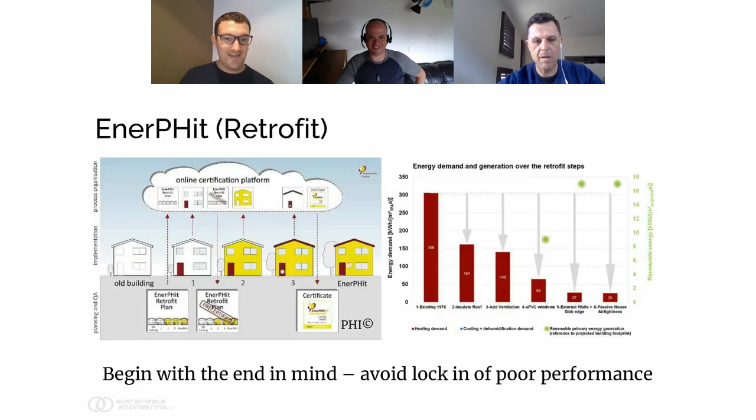Cool, yep, we should get going. Numbers have kind of stabilized, but I'll hand this over to you. I can see you've jumped - let me just put back your slides, Jason. Thank you, appreciate that, good preview of what we'll see today. There's a lot to cover today, but we'll take it at a reasonable pace so it shouldn't be too bad, and we'll try to finish 45 minutes after the hour. It's a different time zone for me. We're going to drop our faces off and we'll see you guys at the end, so that way you can concentrate on this. Yep, and it also means I can drink tea while we're talking. Absolutely.

So just a little bit about myself. I shifted to New Zealand about 10 years ago. Before that I was a rocket scientist - I worked at NASA for a little over a decade doing systems engineering. When I shifted to New Zealand, I wanted to try something different and see how I could make a difference in the world, and ended up growing into Passive House, as it were. I've been doing Passive House for about 8 years now, started off like most people with doing 1 or 2 homes, then moving into more and more projects, and finally becoming a certifier - I'm an accredited certifier with Passive House Institute in Darmstadt. I run a small consulting firm with 4 technical staff here in New Zealand, and we design and certify projects throughout New Zealand. We also certify and help with more advanced consulting on projects in Australia. We do quite a bit, including some more advanced training and that kind of thing.

So I think I've got control of the slides now, let's jump to the next one. So what is a Passive House? This is a Passive House project in Exeter, in the UK, where they've done an immense amount of social housing.

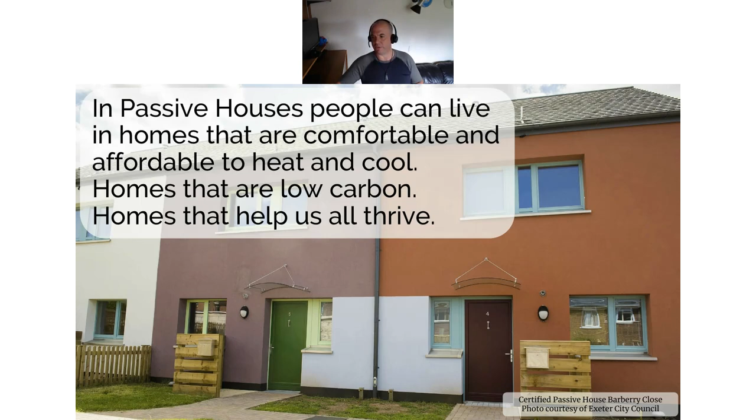This is my favorite definition of Passive House: in Passive Houses, people can live in homes that are comfortable and affordable to heat and cool, homes that are low carbon, and homes that help us all thrive, mainly through their health impacts. A slightly more interesting way to think about it is as a vision for what housing should be - if you talk to architects, designers, or people who live in homes, what should a home be, and what should we do going forward with homes?

When you think about homes right now in New Zealand and Australia, unfortunately both have a relatively high case of excess winter mortality, where people are dying potentially because of the conditions in their homes. We have cold, damp homes in both countries because the people in our politics have failed to prioritize health in housing policy.

We can design buildings that heal us and help us do our best in the world - buildings where the air inside the house is healthier than the air outside, certainly in cities, where it's always fresh and dry in the house. We can design houses where kids don't go to hospital with housing-related disease - this still happens quite a bit in New Zealand and Australia; Australia actually has more mold than New Zealand does. A house where it just keeps itself dry - the towels dry themselves in the bathroom, you don't have a towel rail that you have to turn energy on to dry the towels.

A home where we can build right for the long term. The leaders in the building industry today build houses to the lowest legal standard - any worse and it would be illegal for them to build those houses. Instead, we can have buildings that are a gift to people who come after us in society - built for the long term, low carbon, with less steel and concrete, more timber. We build homes where there's no fuel poverty. When I talk about passive house with clients, oftentimes they're older - they've gone through a few houses.

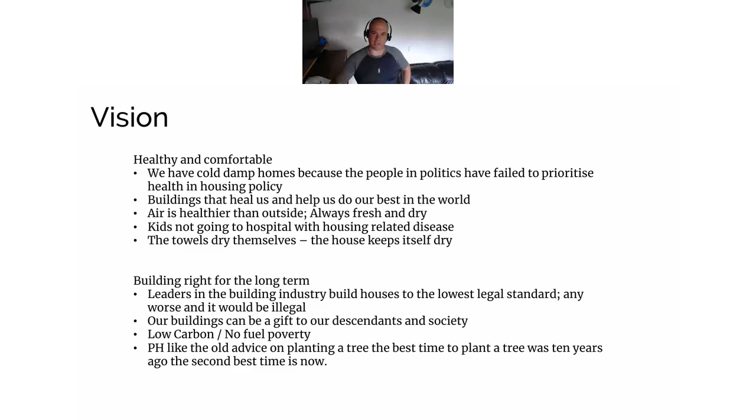So this is another social housing project in Exeter Council in the UK, and it's the last one from the UK, so we won't have a lot of pictures from there. I've got more pictures from Australia.

In Exeter City Council, there's one woman who led the charge towards passive house, and she did it not because she's an architect, designer, or builder. She's actually a property developer, and she grew up with extended relatives experiencing fuel poverty—they couldn't heat their homes in winter because they didn't have enough money. So their vision for passive house in Exeter Council isn't about all the technology and math and thermal modeling I love. Their challenge is to eradicate fuel poverty in their council area by using passive house.

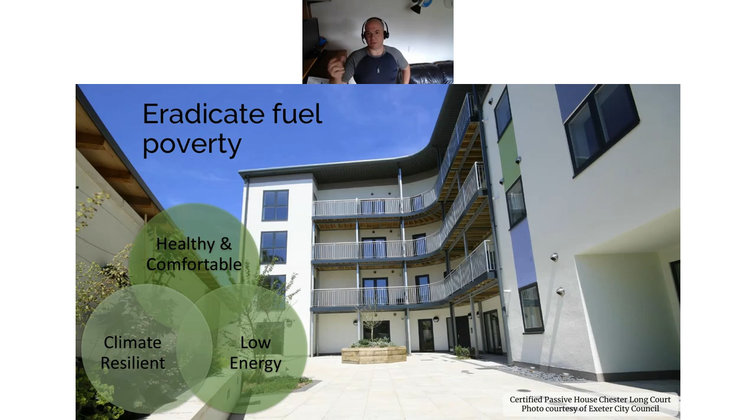So all their social housing projects now are passive house certified. Their aim is that triple bottom line: low energy buildings that are healthy and comfortable and climate resilient. That's their vision for what passive house can be.

Now here's an example of a passive house in Australia. This is a CLT and timber cladding passive house extension designed by Betty and Coote Architects. It's just been certified, I think just two or three weeks ago. This building will have incredibly low operational energy because of its good insulation, needing little energy for cooling and heating, but it also has very low embodied energy in the materials since it's an all cross-laminated timber structure, with timber cladding.

No, it's good for you to jump in—I actually prefer it, it's a bit odd sometimes speaking to a camera.

And this is another certified passive house—the first non-residential passive house in Australia. It's a childcare center, built and certified using a panelized system. I'll show you what a timber panelized system looks like: it's all timber frame with brick cladding on a few walls, prefabricated timber panels dropped on site onto a well-insulated concrete slab. This has also been certified.

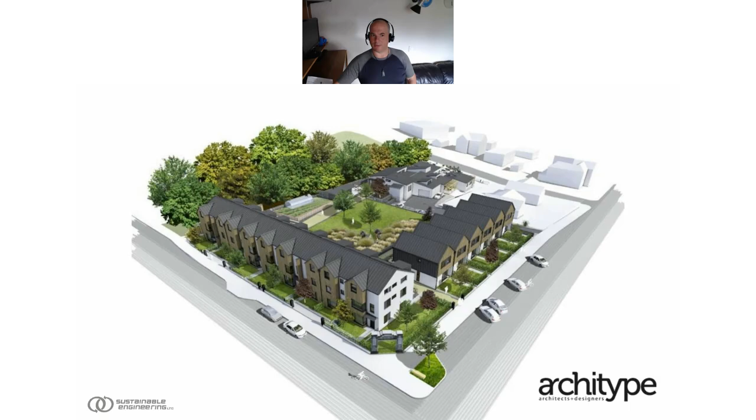Let's just talk for a minute. I don't want to talk about numbers very much in this presentation because it's an introductory one. But it's important that you realize that passive house standard is both a standard as well as a process, if you want to think about it that way.

The heating and cooling demand metric is 15 kilowatt hours per square meter per annum for both heating and cooling. That's the total energy you can use per square meter of the building, so that's a very small amount of energy. That's on the order of 10% for a typical building throughout most of New Zealand and Australia for heating and cooling, and a peak load less than 10 watts per square meter.

Now, this heating and cooling load metric assumes you condition a building all the time. In other words, you're not letting the building get to 10 centigrade in the winter and 35 centigrade in the summer. This is assuming you condition the space.

And then they've got these build quality metrics you have to hit to meet the pass-fail standard. There's an air tightness standard of 0.6 air changes per hour at 50 Pascal. You could argue what the numbers are, and it is much tighter than what it currently is in Australia. But the real key is you can't unintentionally hit that target, even with a structural insulated panel building, which has got big continuous panels that don't leak air. You still need to pay attention to the joints to hit that target. So it's sort of a build quality metric more than it's anything else.

You have to also not have moldy junctions, and they check for that. And also in the summer, you need to check that the overheating limit's met. In other words, the building doesn't overheat more than a certain amount of time and a certain temperature level.

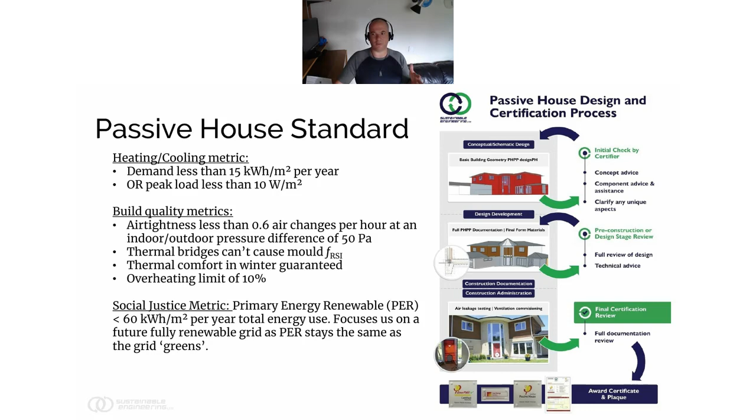And the variation was quite large. In all cases, the measured heating energy was much higher than the predicted for the non-passive houses. Whereas for the passive houses, the prediction and the measurement were very, very close.

Now, that's not only due to the software they use to do this calculation with, which is quite good, but you can use any software - it's like a carpenter, you can use any hammer, it's just some are better than others. And so with this tool, the certification process checks the entries to make sure they're correct.

And because of that, they don't end up with a performance gap. You end up with what you predict before you build the building matching what the building actually experiences in terms of heating energy. So because you can accurately predict the results, you can design the building to hit that result. So instead of designing a building and saying, well, this is a good low energy building and it's going to be pretty good, you can actually say it's going to be X amount of heat per year to keep the space at 20C. And you can know that X is plus or minus 5% or 10%. It's very accurate, when measured under standard conditions.

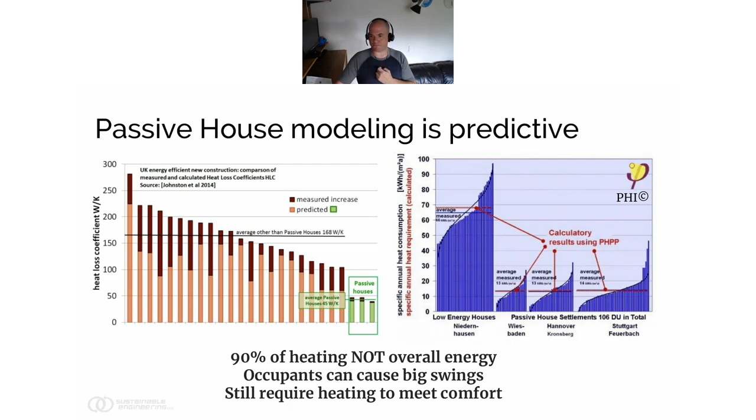All right, I showed you Passive House in different buildings. We showed you single family homes, a very large 26-story residential dormitory hall, and a school, and they're now doing Passive House hospitals.

You can also do Passive House retrofit projects. We have an existing building, and you do what they call an EnerPHit. It's a retrofit project where you take an existing old building and go stepwise along the way to fixing it.

So I had a client call me a few weeks ago. She's now working with us, and she's got an old building in Wellington, New Zealand, which is cold and windy in the winter. She wants to replace all her windows, but she eventually wants a low energy building, a Passive House someday. So this year she's going to replace all the windows, and she wants to make sure the windows she puts in won't prevent her from ever reaching that level.

So that's what EnerPHit is, basically you start with the end in mind. At the end, I want this house to be very high performance with low embodied carbon, so to get there I'm going to do these steps. When I put the windows in, I'll install them so I can move them into the insulation layer later when I insulate the walls. When I redo the roof, I'll insulate it well enough, not just for first cost savings, but so that it works together when I later do the walls and windows.

So the idea with EnerPHit, the Passive House retrofit plan, is you develop this whole plan, sketch it out, and then do the first few steps and get pre-certified. It might take 40 or 50 years to retrofit a building because you're not going to replace the roof until it wears out, but you begin with the end in mind and avoid locking in poor performance later by making a good plan.

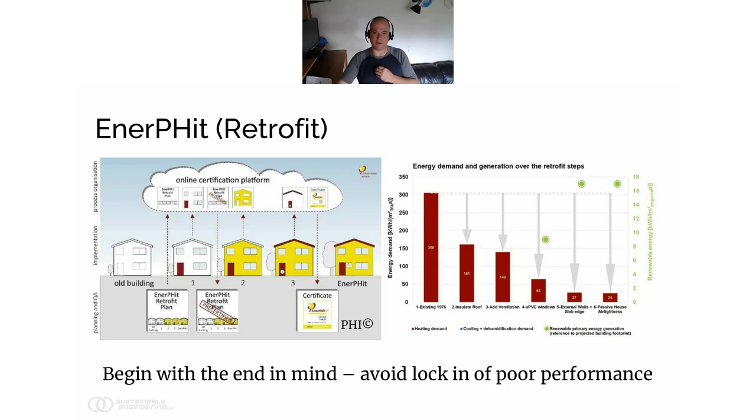All right, so Passive House focuses on the architecture. That's, in my opinion, why they should call it Passive House. I think everybody would agree a different name might be better.

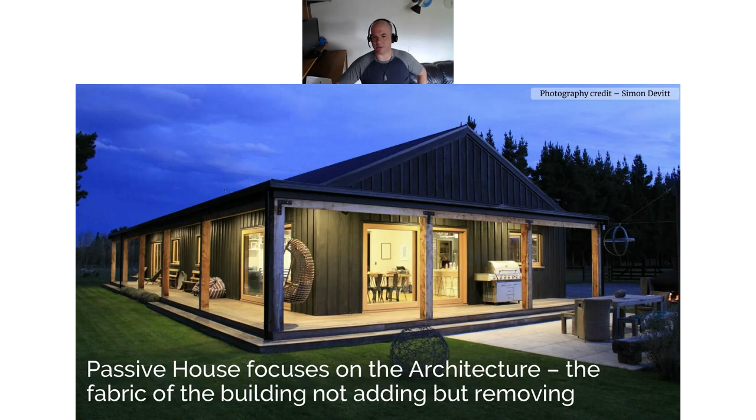There's a heat pump in here. The heat pump will be replaced in 15, 20, or 40 years, but the envelope of this building could potentially last 100 years. It's all timber and fiberglass insulation. There's no reason it should wear out.

That particular building is panelized construction. The school that I showed you in ACT was built exactly the same way: prefabricated timber panels with, in this case, fiberglass insulation and an Intello membrane on the inside. They were brought on site, craned into place, put together, and you stand the building up quite quickly, then seal up the Intello layer on the inside for air control.

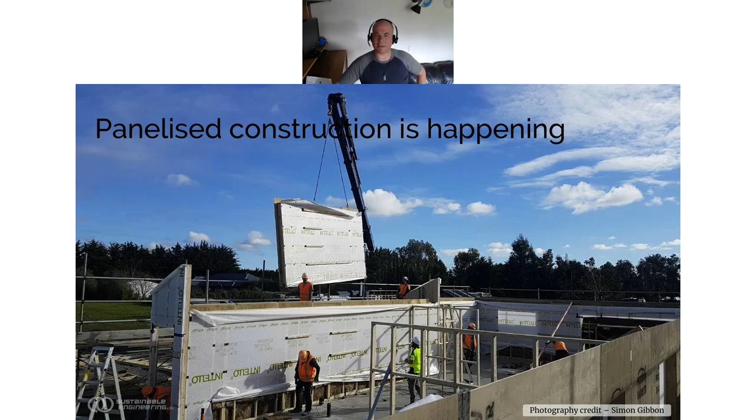So panelized construction is happening both in New Zealand and Australia. The paneling system used in that school in ACT was by Carbon Lite, L-I-T-E. You can look up their panelized system there. They're quite a good company.

Passive House is performance-based. There are lots of fabric options. You can do pretty much whatever you want as long as it meets the performance targets.

You think that's kind of funny, but there's actually a Passive House in my hometown of Wanganui built this way. It's right on the river, and it floods every 2 years. It's a yoga studio with an exposed concrete floor. They just wash it out every 2 years, and they're back teaching yoga classes 2 days later.

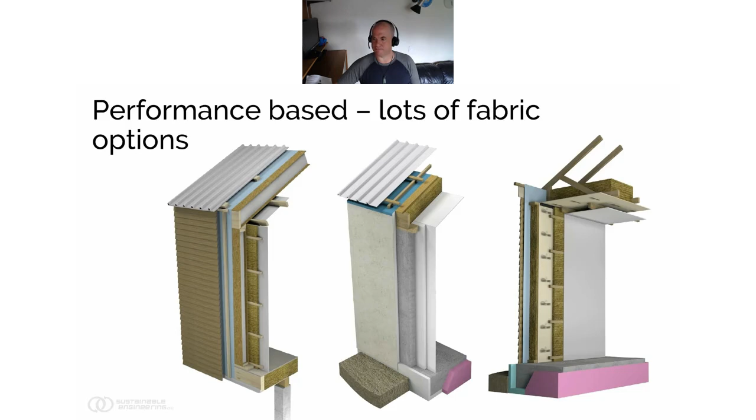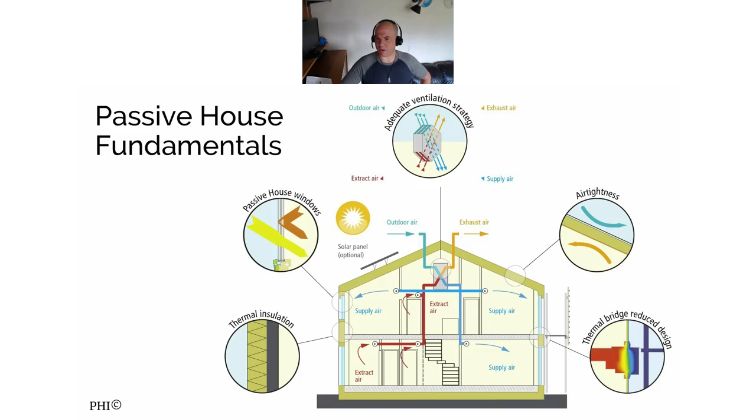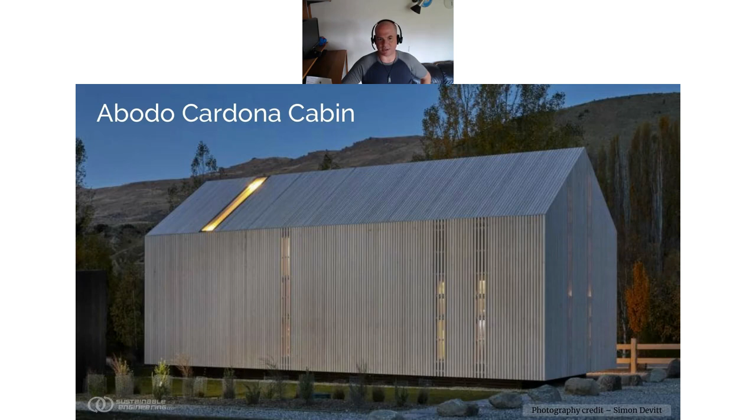This building was designed to display the timber, but they wanted good insulation. So what they've done is basically put a warm roof around both the roof and the walls of the building, making the walls and roof about an R5 assembly—we use metric units in New Zealand and Australia, so it's R5 metric.

Then the floor is a simple timber floor, particle board underneath the Abodo-finished timber, with fiberglass insulation between joists. A simple building, built about 200 meters above Queenstown in New Zealand—so quite a cold climate.

Actually, it's the coldest climate I've looked at a house in New Zealand. That building, in its home location, uses about 98 kilowatt hours per square meter per annum. Remember, we talked about the passive house level being 15—so that building uses considerably more than a passive house.

The interesting thing is I also looked at what this would be if you did a minimum code New Zealand building, and that structure would need 300 to keep that building warm all winter. So it's already, even with just R5 walls and roof, gotten down to a third of the code allowed level. But to get down to 15, you'd have to significantly increase the insulation and go to triple glazing. I forgot to mention it has Abodo timber windows with double glazing, which is awesome.

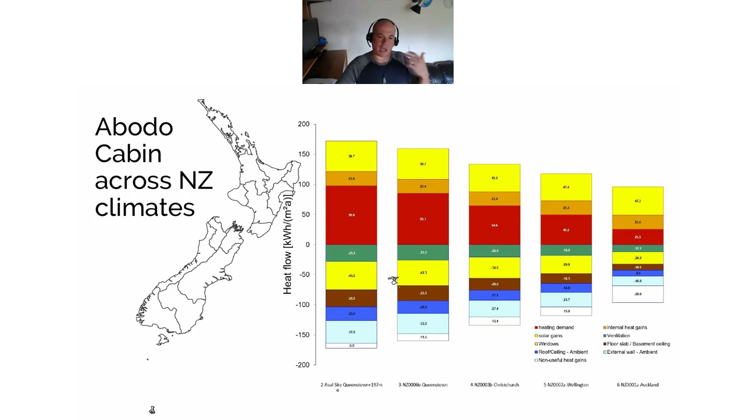The nice thing about thermally modeling buildings in passive house is you can move them across climates and change the structure to see how the building's going to perform before you build it.

So I wanted to not take too much time, but I did want to take a little bit of time to talk through some advice. There's a lot of different ways to get into passive house.

As a designer or an architect, you can take the passive house consultant or designer course and learn to do your own math models in Excel and thermally model the design, or you can work with a consultant or an engineer to do that. But if you do that, it's oftentimes best if before you talk to the engineer consultant, you have an idea what the building looks like. Because engineers, we can't model a building we don't know what it looks like.

We need to have a floor plan. We need to have elevations, window size. We need to know what the site shading is in order to do our jobs.

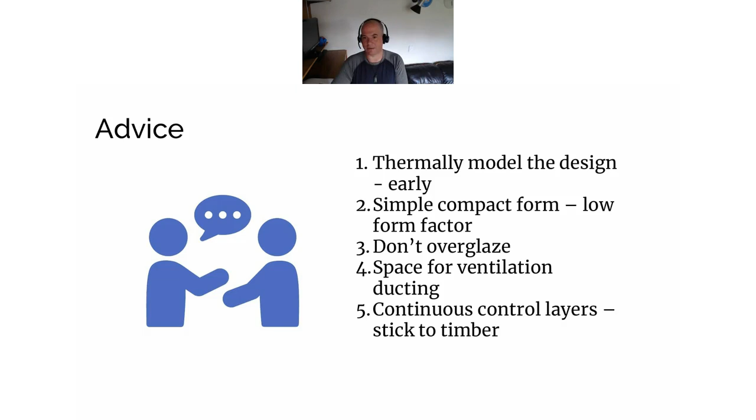So before you do that, when you're doing the conceptual design, those first pencil sketches, I wanted to pull together some advice for you so you can take that away. And the next time you're doing a building and you're going to work with a passive house designer or consultant, you'd already have those things in mind. You could understand that if you do these things, they'll make it easier, and we'll need less triple glazing in Sydney, for example, which you should easily do with double glazing.

So the first thing is I tend to tell a story about cargo cults. So there's this idea of a cargo cult.

It was interesting, a lot of people in New Zealand hadn't heard of this before, but what happened is during World War II, the Americans came into the South Pacific, and they would set up airstrips on different islands that really hadn't met civilization before. They had come because they were trying to defend against the Japanese and all that stuff.

So they would bring in airstrips, and the population living on those islands all of a sudden had a huge influx of consumer goods that just kind of fell out of the sky. With their cultures, they didn't really understand it. So one of the ways they responded is, after the Americans went away, after World War II was over, they tried to recreate that prosperity by running what they call cargo cults.

And they basically would build mock airplanes and march around as if they were American soldiers, in order to try to bring back the good times, as it were.

I don't want to pick on architects too much, but I see a lot of low energy buildings and architecture design buildings that are passive house, or not actually passive houses, but designed to be passive solar sort of architecture. And it's a complete cargo cult. They design a passive house that looks like a passive house. It has all those things I showed you earlier on that slide. They've looked at thermal bridges, they've got really good windows in, they've got good insulation, but they've totally missed the goal because they don't understand the real core essence of the idea.

The core essence is that you model it. If you have a passive house, it's not because you've got good windows, a ventilation system, and thermal bridge free design. That's bullshit. If you've got a passive house, you're hitting the metrics - you've got a heating and cooling load lower than a certain number. In order to do that, you need to model it. There's no other way. So passive house is effectively a standard built around their energy modeling tool. You can use other energy modeling tools just as well, but they're oftentimes much more complicated and more expensive to use. The passive house planning package tool is designed to be effectively the least complex energy model you can do to get a good result.

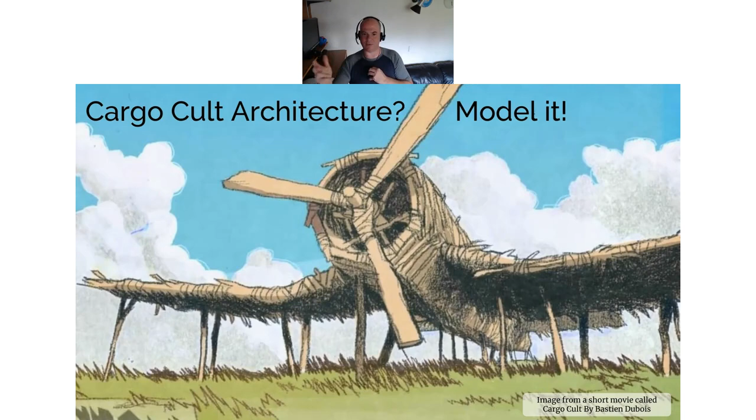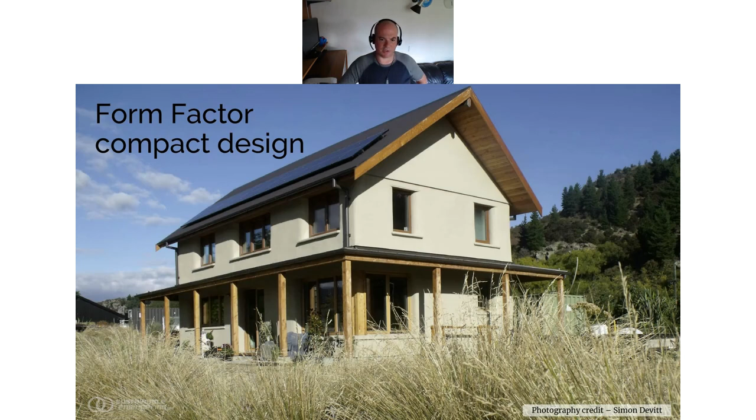And you can see they've got solar panels on this side here that also overhang these windows and provide shading. So it's important in passive house to put in windows for daylight and views, not for energy gain.

If you have a building that doesn't have enough heat in it, you want to just add insulation. You don't want to... if you've got a car that's — I'll stay away from car analogies. But this building here, in my opinion, is a little bit overglazed for the size of the building because it's quite a small building. But the important thing is to have windows for daylighting and views, not to gain energy.

So if you come out of the passive solar background, there's a lot of passive solar books out there. I grew up in the United States in Passive Solar Central. Those buildings are designed to capture as much energy as possible, and then generally they tend to leak all that heat out very quickly. Instead, passive house is designed to let the energy out or let the heat in very slowly, so you need less glass to do that. Generally, if you put the glass in for views and daylight, and that's it, you end up with enough glass in the building. Actually, I usually end up trying to reduce it even more.

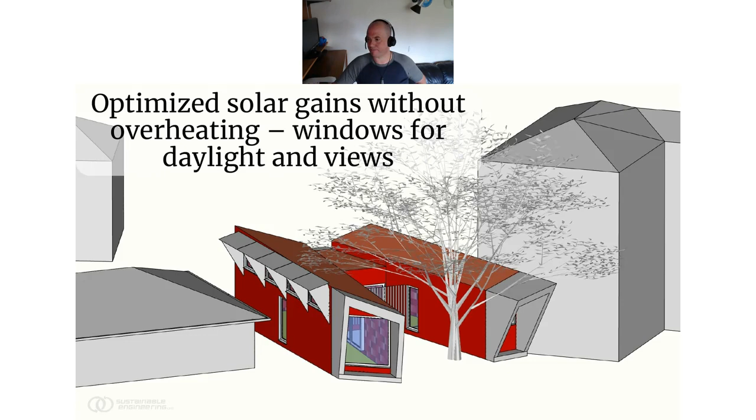There's a number of other brands available — Stiebel Eltron, Brink, lots of different brands that are all certified units. So they're very good quality, and you know their quality because they've been tested by a third party.

So the MVHR sits there and takes in external air from outside, fresh air in, exchanges the heat with the exhaust air coming out of the building, and exhausts the air out. That can be used to recover both heat in the winter and cool in the summer. In a very hot climate like Darwin, for example, you'd use an energy recovery ventilator like this, and it would actually recover cool. So when you air condition the space inside, the cold air going out would pre-cool the incoming air and help condense out the moisture of the air coming in. You'd still need some air conditioning inside, obviously, because you're still leaking heat into the building. But MVHRs are useful for both retaining heating and cooling in the building — effectively, if the inside of the building is hotter or colder than the outside temperature, they're useful.

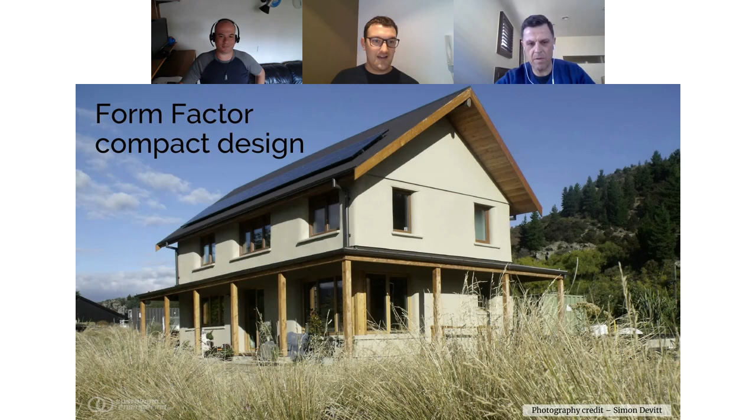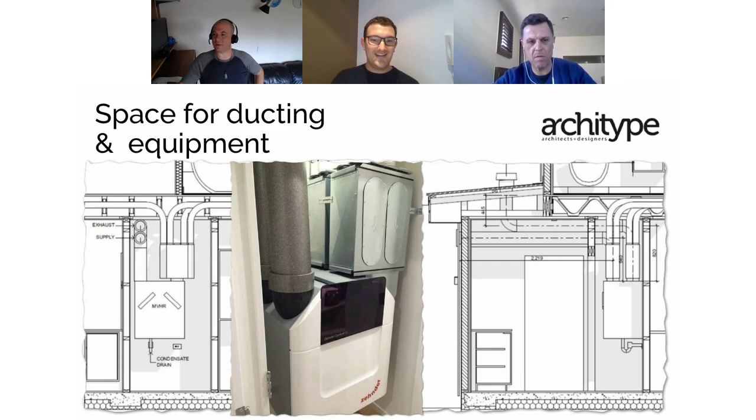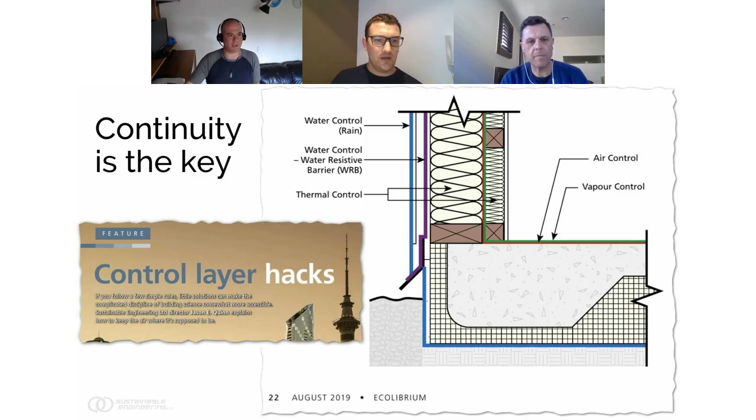And just like an aluminium window frame. We also had the question: what size windows are permitted in a passive house? Any. I like that - easy.

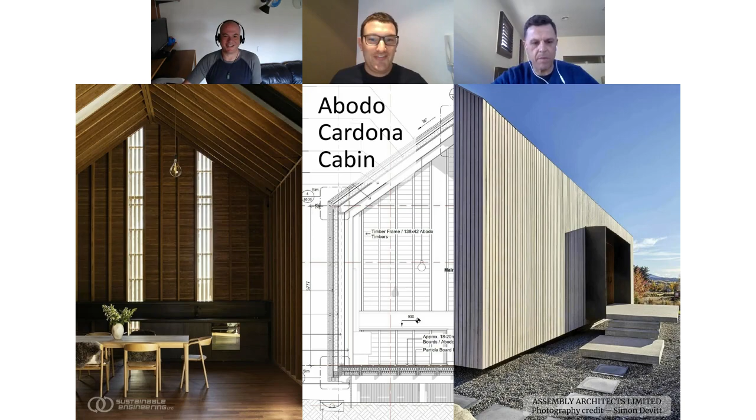And they've done glazed office buildings with nearly 100% glass in Europe with quadruple pane glass. Wow, that was incredibly expensive - it was a crazy amount of money. It was a bank, they could pour as much money as they wanted into that building.

Jason, do you have any advice for designers around establishing costs when they're having the conversation with their clients? It's always going to come around cost. How would you suggest designers go about establishing cost premiums and what have you?

It's best to just get a quantity survey, put together the plans and look at the costs. Oftentimes you'll find you're up-speccing the windows, like going from a standard aluminum frame window to a timber frame window. You might think that's a considerable cost premium if you're going from a standard double glazed aluminum window to a nice double glazed timber window - that's a huge cost premium, right? But if you're already going to get nice timber double glazed windows, you might just be buying better glass. So it really depends on where you're coming from and going to.

A lot of times when people look at passive house costs, they think: I've got this really nice upmarket passive house, and if I take out all the passive house stuff - the really good windows that make the building quiet and work well thermally - and put in the cheapest double glazing I can find with aluminum frames, and take out the ventilation system and just tell them to open the windows when it gets stuffy at night, and take the extra insulation out of the roof and walls and don't insulate the slab...